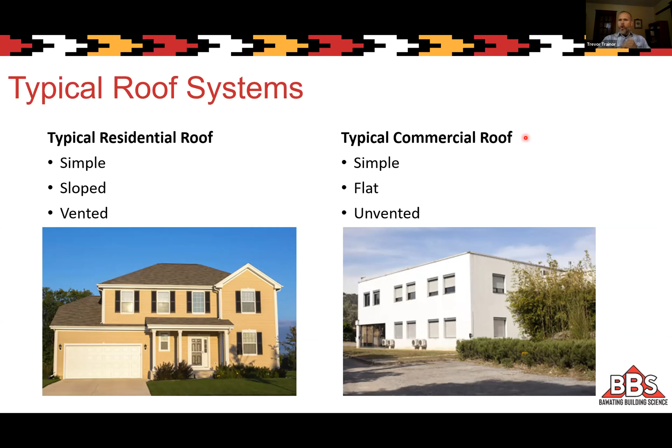So when we have these two different types, we know how to do them, and it works pretty well. Where we start to see issues is when we mix and match these things. In the residential arena, what I'm seeing are a lot of flat roofs, roofs that have high slope along the side and flat on the top. So there's a combination of the two. I guess even these aren't really a typical mansard that we would have seen in the 70s or 80s. These are different because there's often a living space up in there, and a lot of complexity to these types of roofs. So we see a mix of sloped sections and flat sections.

What we are seeing is when we attempt to ventilate some of these types of roofs, like we did with our classic residential roof, it's really difficult to do. We just get poor ventilation out of them because of the geometry typically, and because of the construction techniques we use. So these are the ones we're going to really talk about in detail, and what type of approaches we can use to address some of these more complex roofs.

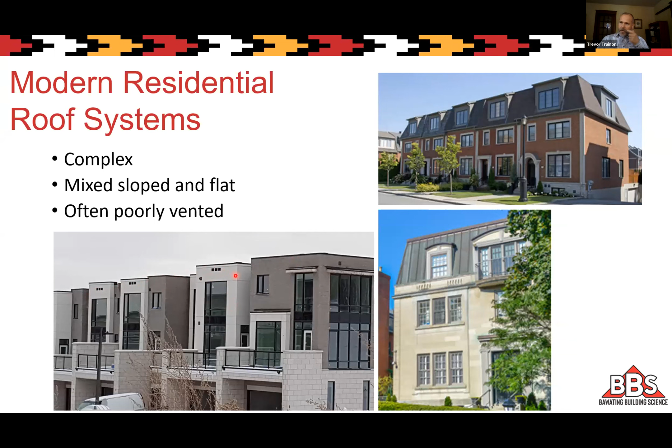So anyways, as you can see in this picture, this was a development beside one I was working on. The development I was working on looked a lot like this, but they used an unvented roof approach. In this one, you can see that they're attempting to use a vented roof approach. More about why I don't recommend that.

So to get down to some of the building science fundamentals behind this, we're going to talk mostly about air movement in buildings. For air leakage to occur in a building, we need two things: we need a pressure difference across the building enclosure or within a building enclosure, and we need some type of hole, some pathway for the air.

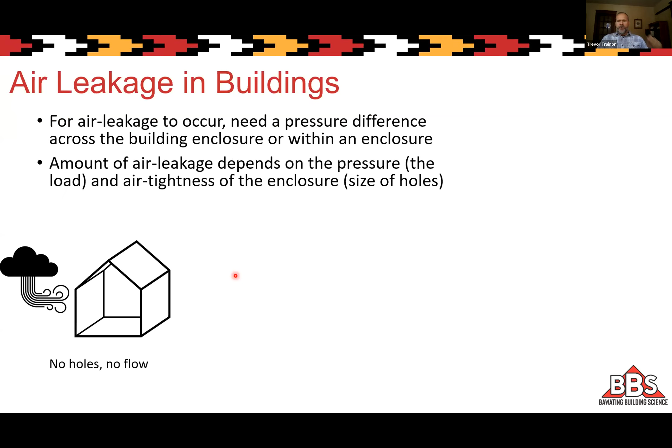So if you have pressure and no holes, if you have a perfect air barrier, you'll have no air leakage, right? You can have holes without pressure potentially, and you wouldn't get any air leakage either. It's only when we have those two together, a pressure difference and a pathway, that we're going to see air leakage into or out, or both, of a building. So it's important to realize there are two factors at play, and they play off each other, as we'll talk about in terms of a balancing act.

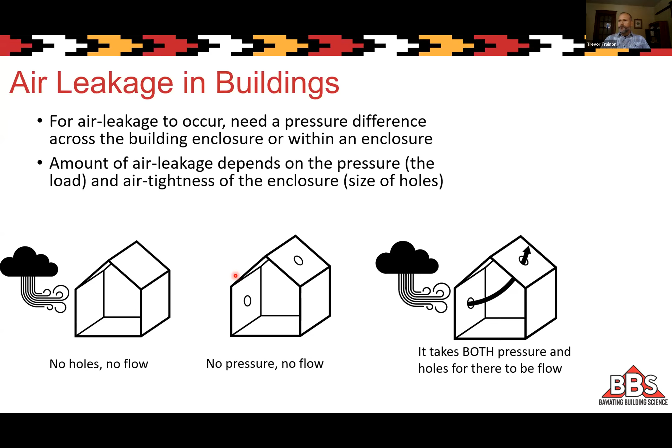So the first thing we think about typically when we talk about pressures on buildings is the wind. The wind's the most extreme pressure a building will see. Wind pressure is very much a function of the wind speed in the area you're in, the building geometry - is it a tall building, a short building - and also what's around it. What's the local topography? Is it sheltered? Is there a wind tunnel due to high-rise buildings tunneling area? This is a very complicated thing for an engineer to try and estimate because of all these factors.

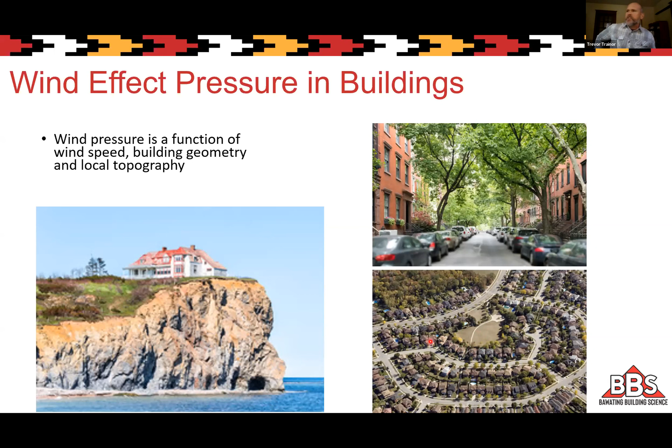So obviously in these three examples, we're going to see very different wind patterns, peaks and averages. It's difficult to predict, especially when we're designing a building. Obviously this building on the cliff is custom designed - they knew exactly where it was going to go. If we look at the bottom right example, all of these houses, as they're designed, it's not really specified which direction they're facing or what's around them. So it's not something we can really design to, but it's an important factor.

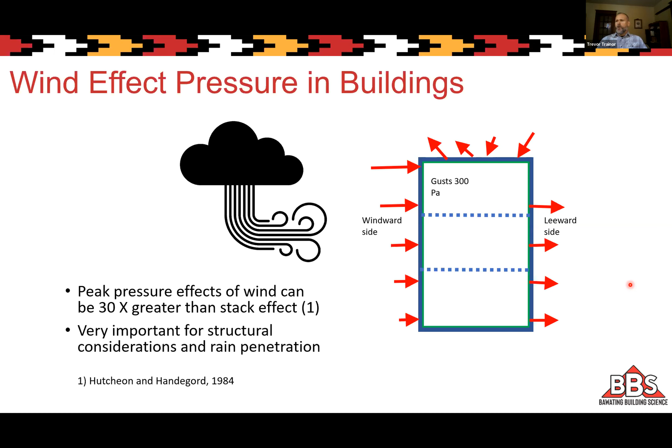The other thing we need to remember about wind effects is that the peaks are really what we're worried about in design, not so much from a building science standpoint, more from a structural standpoint. The peak wind pressures we see can be 30 times greater than the next type of pressure we're going to talk about, which is stack effect. So the peaks are really high for wind pressure, and it's important to think about those peaks in terms of structural considerations. How is your cladding attached? Rain penetration, it's important to understand those peaks for that reason.

But overall, the average pressure due to wind is actually a lot less. It's only a tenth of what the stack effect pressure would be on a building on average, which we'll talk about next. So it's really that long-term average that's important from an energy analysis standpoint or for natural ventilation. If we're trying to use it for natural ventilation, it's not very reliable, because although the peaks are high, the averages are very low, so it's definitely less effective in terms of relying on wind pressure to help us.

So we don't really want to rely upon wind pressure as a significant contributor to attic ventilation—that's really one of the points I wanted to make here. That's an interesting point, because from my background as a builder, and of course building science training, it's very easy to think, well, the wind's always going to depressurize, it's always going to carry the bad stuff away. But your point is it's not reliable—it could be creating a positive pressure one day and a negative pressure the next day, depending on directions and depending on what the surroundings of the building are.

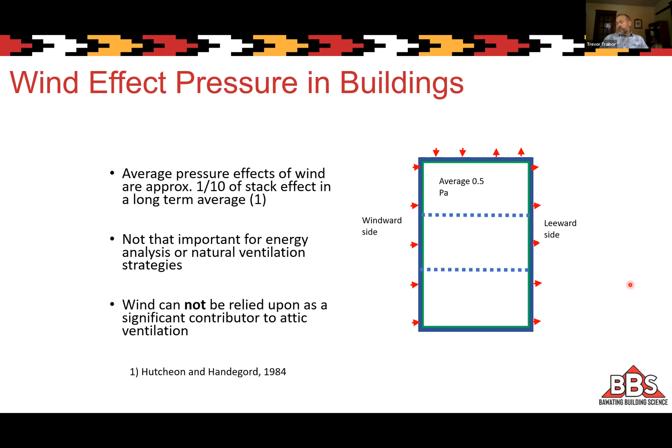So wind effects are the ones we think about the most, but it's probably not the most important in terms of roof ventilation, which is what we're going to talk a bit more about, or even air leakage potentially. We might realize that stack effect is actually probably more important.

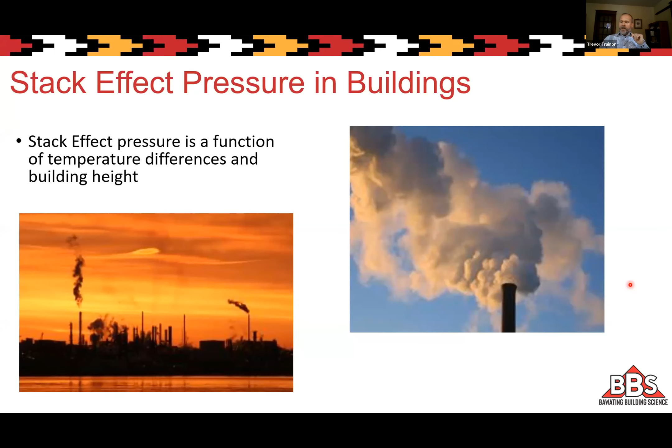So stack effect pressure is a function of the temperature difference from inside the building to outside, and of the building height. It's probably important to note here that this is really a cold climate focused presentation, and we're assuming we're in the heating season for a large portion of our year. Because if I was to try and give this presentation in Texas or Arizona, we'd be talking about different things in different ways, because stack effect is not nearly as important there. So as a cold climate focused group, stack effect is really important for two reasons.

The first is the effect it has on air leakage in our buildings. Stack effect pressure is a result of the different densities of air at different temperatures. So as an example, if we have 20 degrees Celsius air inside, it has a density of 1.2 kilograms per meter cubed, whereas if it's -10 outside, the air density is 1.34 kilograms. So the air inside the building is much lighter than outside, and it wants to rise up—just like a hot air balloon wants to lift that balloon up, this is going to try and force air out the top of the building.

And if air can leave the top of the building, it's going to try and suck air in at the bottom of the building. So we have these different pressures at different areas of the building, and where they meet, where we go from a positive pressure to a negative pressure, is what we call the neutral pressure plane. I won't talk a lot about it, but it can be useful, even forensically, to determine where the neutral pressure plane is in a building. If there are more holes high in the building, you'll have a higher neutral pressure plane, and if they're lower, you'll have a lower neutral pressure plane. That's something we can quickly measure in a building and use to help us. But really the key point is that stack effect happens whenever it's cold outside and warmer inside—the colder it is and the taller your building is, the higher these forces are going to be on your building.

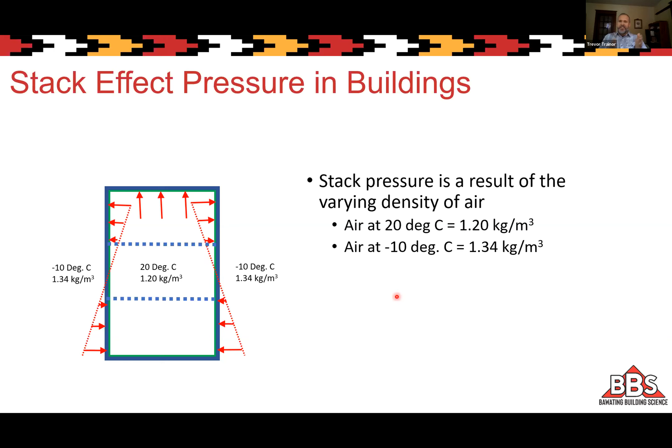And it doesn't change day to day, changes season to season, but not on a daily basis due to like wind does. So what can we see? We can see pressures in the range of about probably 6 pascals of pressure, positive at a roof and -6 in a basement, say for a 3-story townhouse, for example. It's pretty typical, again depending on the height of the building, depending on the temperatures outside.

But remember, this is sort of a constant pressure from a day-to-day perspective. So if you do have leaks up high in your building, you're going to get that air leakage outward, and it's going to be pretty constant. It's not going to be just during the day or just at night or just when it's windy. It's going to be pretty constant.

And so the cumulative effects of that air leakage actually make this stack effect really important, as opposed to wind effects, which may create air leakage at a higher rate, but only for a couple seconds at a time.

So vented roofs, that's important to understand when we talk about getting to venting roofs also. So not only does the stack effect pressure affect the building, it actually affects our vented attics also. And I'll get into that a little bit more.

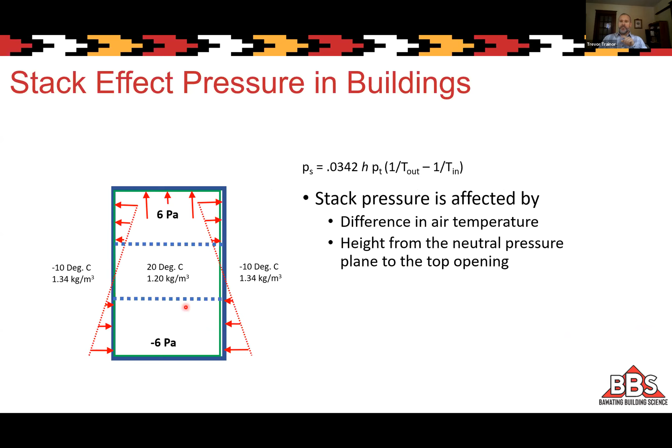So vented roofs we're going to talk about first, and why they usually work and why sometimes they don't work. So if we had this, I kind of use this simple diagram to help understand some of these effects. And we use this also in some of our forensic cases to kind of explain what's going on.

So if we had a perfect air barrier in our building, we're still going to have this 6 pascals of pressure trying to push air out of the building. But if we have a perfect air barrier, we're not going to get any airflow. We'll get some heat loss from the building into the attic. And so what that's going to create is the attic's going to be a little bit warmer than the outside temperature, just from that heat loss, but only a little bit. And we have no moisture that's able to move from inside the building into the attic if we have that perfect air barrier. So if we have a perfect air barrier, we don't really even need ventilation, right?

And this is going to kind of come back when we talk about unvented roofs and how they can work. But the reality of the situation, especially in our typical roofs, is that we've got these holes, right? When we're typically using polyethylene sheet as our air barrier, it's really difficult to make that very airtight. We've got lots of penetrations, we've got joints, and we've got transitions in areas that are difficult to seal.

So in reality, we're probably looking at this, where we're getting a certain amount of air leakage from inside the building. And because of this stack effect pressure, it's going to constantly go into the attic. And if we have no ventilation in our attic at all, it's just going to build up. You're going to get a warmer temperature in here. We're going to have very high humidity till it basically hits 100% humidity. And that's when we start to see our attic rain. Or in this case, depending if it was really cold out, it might be attic frost. That will turn to attic rain on the first warm day after that.

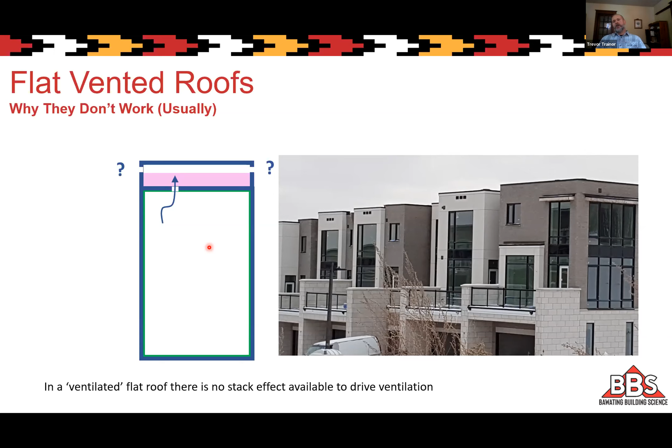This is why I don't recommend attempting to ventilate a low slope roof like this, because we don't have that reliable stack effect due to the height difference to drive ventilation regularly—we're really just counting on wind. I think it was John Straube who said that's the Dirty Harry approach to ventilation: are you feeling lucky? I never feel lucky, so I like to have reliable sources of ventilation.

So again, this is a balancing act. If we're going to keep moisture from accumulating in our attics, we need to make sure we have sufficient ventilation and low enough air leakage from the building so that balance is maintained.

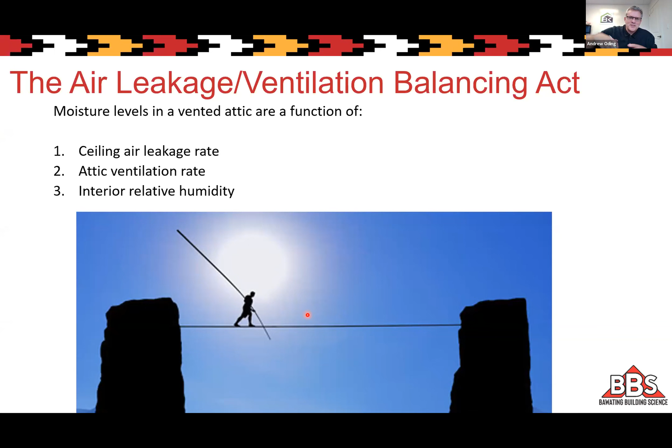Hey Trevor, real quick—you might talk about it in the future, but we had one comment about using a roof ventilator, a fan-powered assist, or the old squirrel cages we put on the roof where the wind would blow them and suck that bad air out. What's your thought on that?

I don't address that directly, but indirectly—the interesting thing is if right now in this example we have a 0.5 Pascal positive pressure in our attic, that means the air wants to flow out. If we start pulling air out, we might create a negative pressure in here relative to the building. Say we had a power vent, or two power vents, sucking air out—the problem is now we're creating a negative pressure in the attic relative to the building, and we're going to start exaggerating this air leakage.

We're going to make it worse, so it doesn't help our balance. We're increasing one but also increasing the other, so we kind of end up in the same place. I remember there was a CMHC project years ago in Sudbury that had attic rain, so they put in squirrel cages. What ended up happening is it exaggerated the leakage and pulled more moist air in. About a month later, someone was saying you'd see plastic bags over top of these squirrel cages. I have seen that.

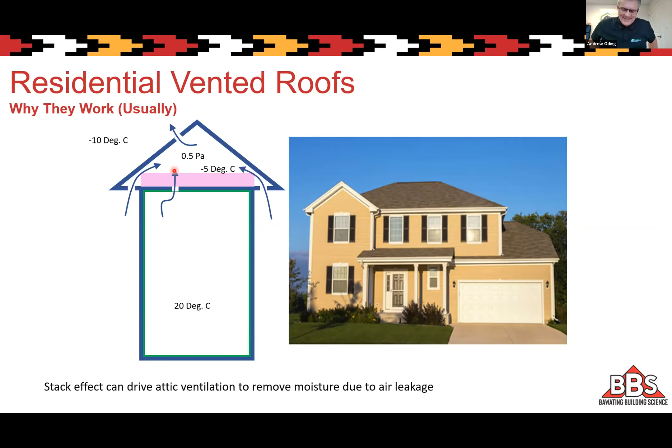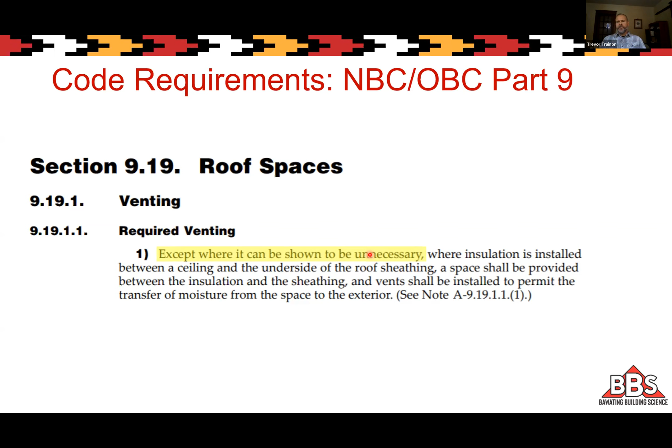Right, interesting. In reality, what we're seeing in the field is that oftentimes, to make building inspectors happy, the 'except where it can be shown to be unnecessary' clause is satisfied with an engineer's letter saying we've looked at this system, analyzed it, and it doesn't need to be vented. There's different approaches to that, one of which is hygrothermal modeling, others just experience or research in the field. I found it really interesting that they specifically called out factory-built buildings, but I think it should be a lot more general than that.

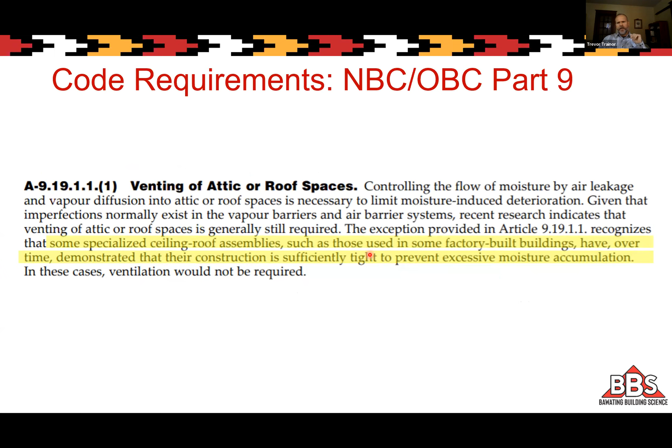Then venting requirements - this is the part most people are familiar with. It says, except as provided in the next sentence, unobstructed vent area shall not be less than 1/300 of the insulated ceiling area. That's our typical vented roof. But where slope is less than 1 in 6, or in roofs constructed with roof joists - which I find a little strange - the unobstructed vent area shall not be less than 1/150 of the insulated ceiling area. So if we have a flat roof, a low slope roof, or a vaulted ceiling with very limited air movement above, we have to use twice as much venting.

These are obviously very general requirements, and these numbers tend to work well for us for the most part, but just because you meet the code doesn't mean you're necessarily not going to have any problems. That really comes down to how airtight your ceiling plane is. If you have excessive air leakage, either of these could be not enough. If you have really good air tightness, we could get away with much less. But if you don't understand exactly how airtight your ceiling plane is, this is probably a relatively good approach. Although, like I said before, I don't recommend low slope roofs to be ventilated, for the reasons we talked about.

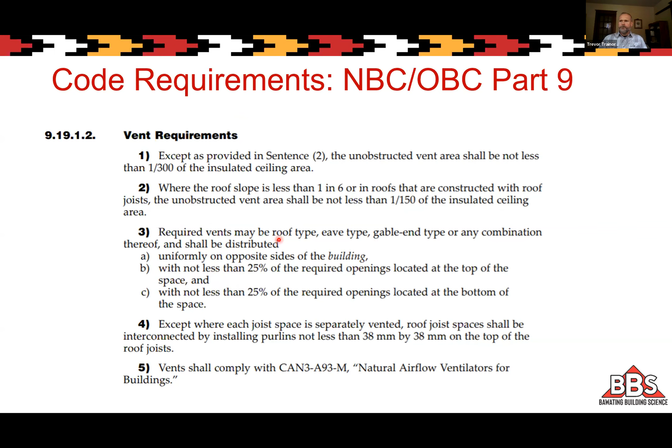So now I've got a couple of forensic case studies - one specifically related to a ventilated roof that had problems. This was residential, the kind of buildings I'm seeing a lot in Toronto. This one, the roof, as you can see, has no roof overhangs at all, so soffit vents are out of the question here. There's an integrated gutter system behind this little parapet wall, a steep pitch at the perimeter, and a flat section on the roof.

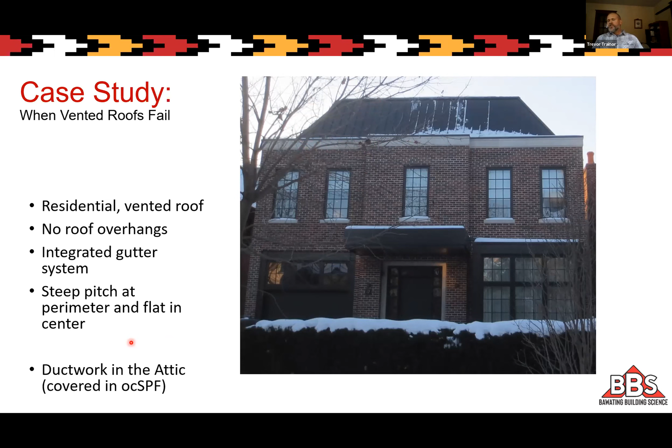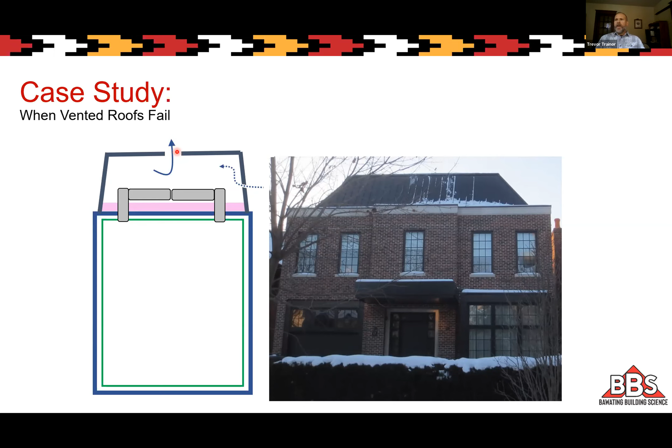Also note that there's ductwork in the attic, because that became an important factor. So to show that in simple form: we've got the main part of our building with our air barrier, our roof sitting on top, and just blown-in insulation. We have some ventilation, lower down in the roof, and quite a bit at the top of the flat roof. This represents our ductwork that goes up into the attic.

So what were the issues? The first issue was they were seeing water marks, water staining on the second floor ceiling after a long cold spell, once it warmed up. So they thought that was potentially an issue.

They went up into the attic on a colder day and found excessive frost buildup on the roof sheathing, at one of the vents. This is actually supposed to be an intake vent, but because of the dynamics of this roof, it ended up being more of an exhaust vent, even though it was lower down in the ceiling.

So the first thing I did was evaluate the ventilation. It turns out there was sufficient ventilation high up in the roof to meet code—4 twelve-inch round vents. I think 1 or 2 of them were whirlybird vents, and we suggested they change those to static to avoid the problems with negative pressurization.

The big problem from a ventilation standpoint was that there was very little low ventilation. These were integrated into the steep part of the slope, very small, 1 inch by 8 inch vents, and there are 6 of them on the whole building.

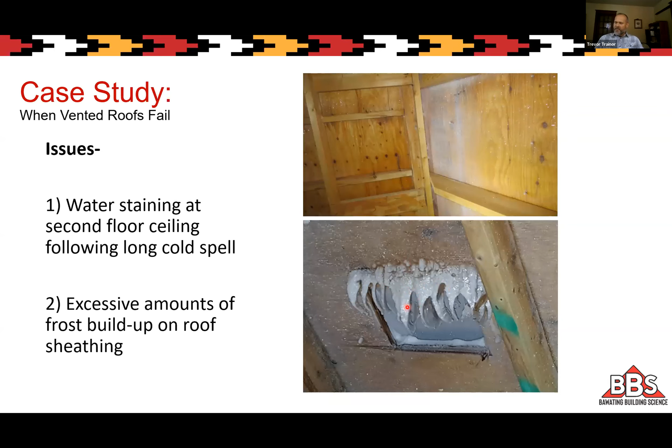So we did the ventilation analysis and said, yeah, there's definitely not enough low ventilation. There's also some other problems. The ductwork itself was actually very leaky, and it was covered with open cell spray foam.

This is just one example of the gaps in the open cell spray foam we could see and feel. Open cell—some would call it a half pound foam—is an air barrier, but it's not a vapor barrier, and it's not even an air barrier when there's big holes in it. That's probably the biggest issue.

I believe they were counting on that spray foam as the sealing for the ductwork. I did find later in the code that it's very specific—while you're allowed to put spray foam on ductwork, prior to that you need to air seal it properly. The code calls out a few different ways to do that.

So one thing I had to teach the builder right away was that we can't count on spray foam at all to seal ductwork, and certainly we can't count on half pound or open cell spray foam to seal anything, really, on ductwork.

Leaky ductwork, insufficient low ventilation we talked about, and we did also find some pretty significant air leakage at the ceiling plane through pot lights and some other detail areas that were not properly done.

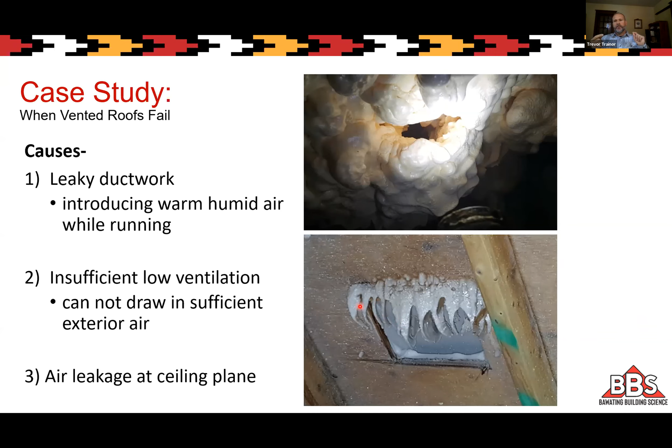So all 3 of those were contributing to an imbalance. Our balance is gone because we're putting too much warm, moist air into the attic, and we have too little ventilation to avoid accumulation. So what do we recommend?

We recommended properly air sealing the ductwork and properly air sealing the ceiling plane, and they did that. We recommended installing more low vents. They couldn't really add too many more, but they did add—I think they doubled the number. They're still not very effective vents the way they're designed and positioned, but we added quite a bit more.

And then as a temporary fix, we added this inline fan and attached it to one of the low ducts. What we were doing here is drawing in cold air. So as opposed to a power vent, which pushes air out, we're forcing air in because there was so much moisture accumulated in the sheathing and in some of the wood members that we needed to dry it out for a month.

When you say air seal, it looks like complex geometry there. Is that closed cell spray foam, maybe a single lift? Yeah, there was some closed cell spray foam used at tricky areas to make that seal. It's not always the best way to approach that. Obviously, from a design standpoint, you wouldn't make it mostly poly and then use some spray foam, because the two don't play together that well. But we made major improvements in the air tightness of the ceiling plane, and then used this fan temporarily to dry out the attic.

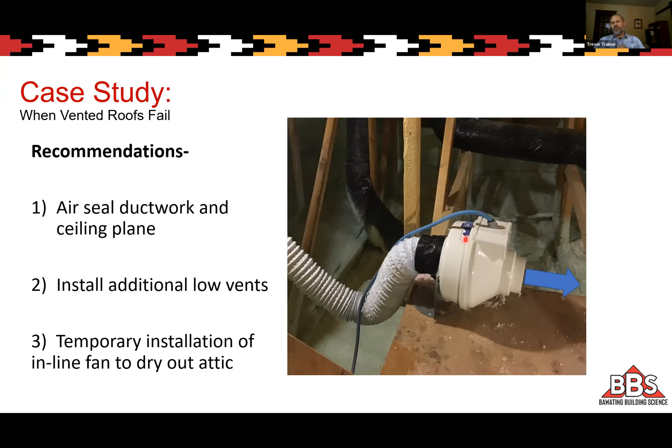So a bit of a summary then, some of the benefits of vented roofs for residential: they can work in any climate, cold or hot. Generally speaking, they're cheap and easy, since we can use lots of loose fill insulation if we want, and get high R values without too much cost. We're really familiar, the trades are really familiar, with the polyethylene air vapor barrier, and it's readily available and cheap to use.

This system can tolerate some air leakage from the building into the attic, because it can flush that out if we have enough ventilation. Also, an attic like that is really good at drying out. Once the weather changes from cold to warm, or even just a hot day, even on shoulder seasons, a lot of drying can occur because the attic is vented. So even if we do get some accumulation of moisture in the attic during the winter, as long as it's not too much, we can dry it out quickly once the weather changes.

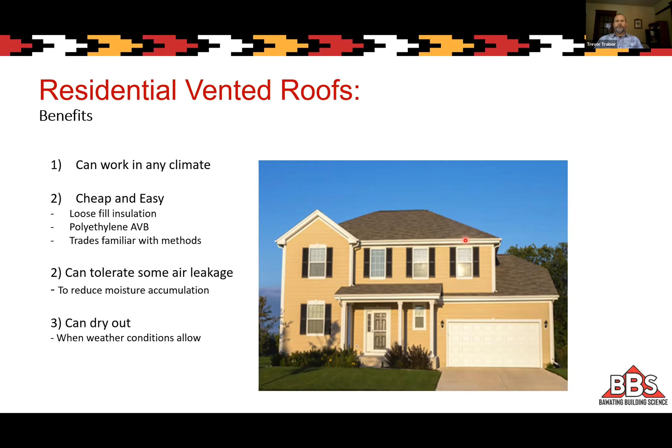What can go wrong? Any thoughts on the difference between, say, a plywood versus an OSB roof sheathing? I think there is some difference, but not a lot. In terms of ability to withstand moisture, I think they'll both absorb moisture and become wet really easily. The only real difference is plywood will last a bit longer being wet - instead of seeing your roof sagging after 3 years, it might take 5 years or something. They're both going to break down, and OSB will break down a little faster, but I don't think it's a major difference between the two.

So what can go wrong? Too much air leakage, right - pot lights, attic hatches, we see over-pressurizing the building. If the building is being pressurized by the mechanical system, that can force more air leakage into the attic, and same with negative pressurization of the attic. The other thing is just not enough ventilation, so we don't have enough free area. Sometimes we have clients who want these fancy vents that don't look like vents, but they also don't work like vents. They need to function - we need enough free area in the vents to allow that air movement.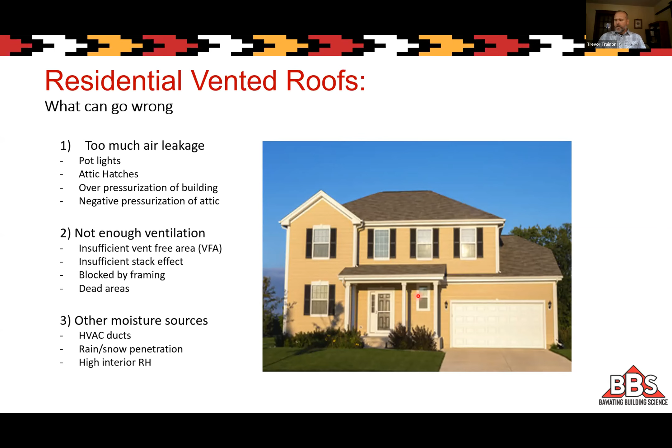So, unvented roofs. Sometimes, as we know, we don't want to vent our roofs, and we'll talk about what those circumstances are. We're going to talk about why unvented roofs usually work, and sometimes they don't. So when should we consider changing from our normal vented roof to an unvented roof?

I think when roof lines get really complex - there's a lot of blocking, a lot of framing, dead ends, dormers, and roof sections that become walls - when things get complicated, it becomes difficult to properly ventilate, and so we should start to think about whether an unvented roof's better. Certainly vaulted ceilings - if we're going to have vaulted ceilings and we don't want a large attic above them, we probably are going to want to consider unvented for that.

Low slope roofs, flat roofs - we talked about why that is, because they don't have the ability to constantly ventilate themselves. Trevor, what would you consider to be low slope? Less than 3:12. Okay, less than 3:12, that's a good point, just a good rule of thumb. It's a good rule, and that's the general rule for using different roofing materials, right?

Does the building code assume that a wall becomes a roof at what, is it 2:12? Yeah, we had this conversation. Yeah, I forget how it defines it for sure. Okay, don't worry about it. But I think the thing to think about is if it's connected into the roof, connected into the attic, then we should try and treat it like a roof as opposed to a wall, because if there is communication of air between the two - yeah, it gets blurry for sure.

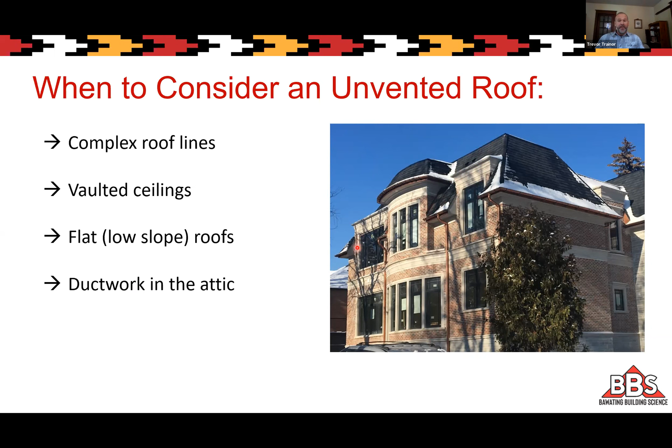So let's go back to that commercial unvented roof, the super simple one that just works. Why does it work? Well, first of all, we've got multiple layers in this roof acting as an air barrier. So we've got our fluted steel deck, or even a wood deck with trusses, whatever you've got here, and you've got some type of sheathing over top of that, and a specific air barrier, and maybe an air vapor barrier right at this level.

Then we've got layers, probably multiple layers of rigid insulation, staggered joints potentially, and then a whole other layer of probably a fiberboard or something to hold our roof membrane, and then the roof membrane itself, which is continuous. So all of these layers are air barriers to themselves, and when you start to stack them all up, there's very limited risk of air moving through this assembly because of all those air barriers.

The other great thing is now our insulation is exterior to our structure, so that means our structure stays on the warm side. If warm, moist air from inside gets up into here, there's no cold surfaces for it to condense on, so we don't have to worry about condensation down at this level.

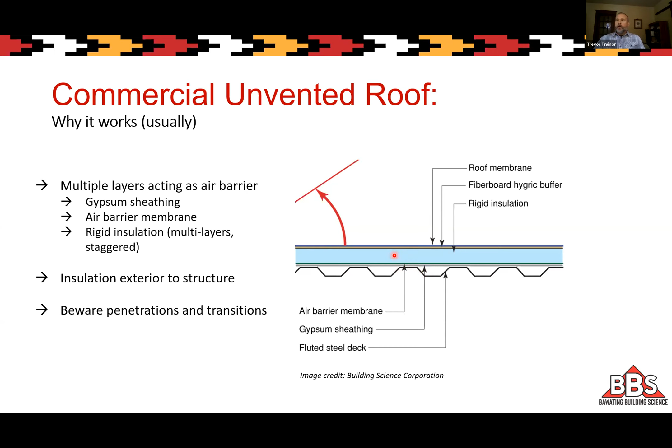And really all we need to worry about in an assembly like this is penetrations and transitions - how do we transition from roof to wall, how do we deal with a chimney poking through, right?

I think I have some examples of that. In this case, you could see, and I do see problems on flat roofs, and it's almost always these two areas where things penetrate through.

The air barrier, which is down here at the bottom, doesn't get properly sealed. It's not continuous at these penetrations sometimes, and we'll get air leakage and moisture issues around it. We'll see condensation and wet sheathing up here at the top of the penetration.

The other thing we see are parapets. So if this air barrier comes to here and just kind of stops because this parapet was put on before, what's to stop warm, moist air that's in the building from going up into this parapet and finding cold surfaces to condense on.

We've actually seen, and you probably have too, spalling or efflorescence or subefflorescence, whatever is sometimes occurring in parapets, and it's from the air leakage that's working its way up in there and then leaving the water.

That's interesting. Yeah, I was at a swimming pool where we went bright and early in the morning. It was like minus 15, I think, out, and there was steam coming from under the parapet cap.

So what we need to make sure in this case is that the air barrier is put on continuously under the parapet and ties in to the wall system air barrier. We see this now a lot more, where there's a strip of air barrier that's installed before this parapet's built, and we just have to make sure we tie in properly on both sides of that after.

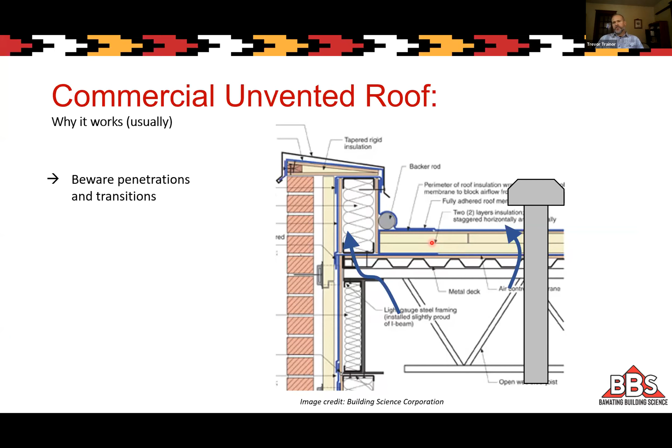But what we realize residentially is that this is a pretty expensive way to build a roof compared to how we do it residentially, so it's not a common approach. So what are the approaches we're seeing in the field residentially when we get to unvented roofs?

The first one, and notice the big red not recommended. I used to have it down here small, and someone said that looks terrible, like, oh no, it's not recommended. Sorry, but it happens.

That's just basically sticking batt insulation and a polyethylene air vapor barrier into a roof. This could be sloped or it could be flat, in all these examples I'm going to show you. Same theories are important.

So this batt insulation has no ability to slow down air, and so we're completely counting on our polyethylene air vapor barrier. As we know, in most cases that is not a very good air vapor barrier, which it would have to be. It would have to be almost perfect for this system to not fail.

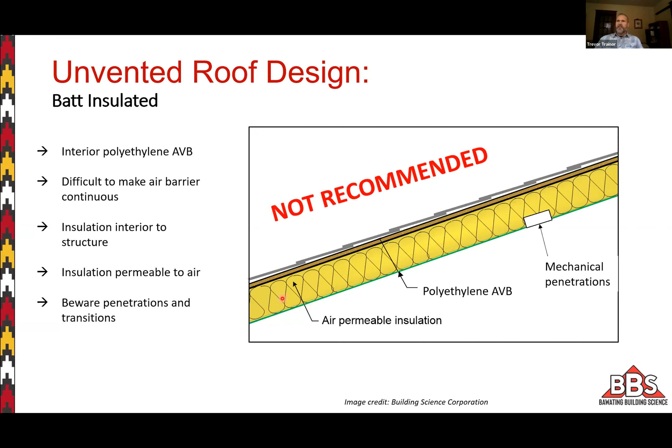Because any moisture that gets past our air vapor barrier here is going to start going up this slope, meet the cold sheathing, and condense. It's going to build up tons of moisture very quickly. That's why this is something we still see sometimes, but it's definitely the not recommended approach.

So what are some of the recommended ones we see? Obviously, this is basically a residential version of that commercial roof. All the insulation's on the exterior of the sheathing, and the air barrier is exterior to the sheathing.

We also don't see this very often because it is a rather expensive way to build, but this is the sort of ultimate way to do an unvented roof. It's easy to make the air barrier continuous. The insulation's all exterior to the structure, so the structure stays warm and dry.

But even in this, we have to worry about penetrations and transitions, because that is always going to be an issue we need to deal with.

I think I remember Joe Lstiburek talking about he did this on his barn, and he made the same comment that Gord Cooke made when he did this on his cottage, that you just need to make sure you put a slip sheet material in between the insulation layers, because as it gets hot outside or cools, they move.

Yes, and I remember Gord saying they would be inside the house and it's dead quiet and they'd hear this clicking sound. Oh yeah, ratcheting.

And then the other thing too is the importance of offsetting the butt joints. But anyways, if anyone hasn't seen it yet, there's a great article from probably 10 years ago now by Joe Lstiburek on the lessons learned from his barn.

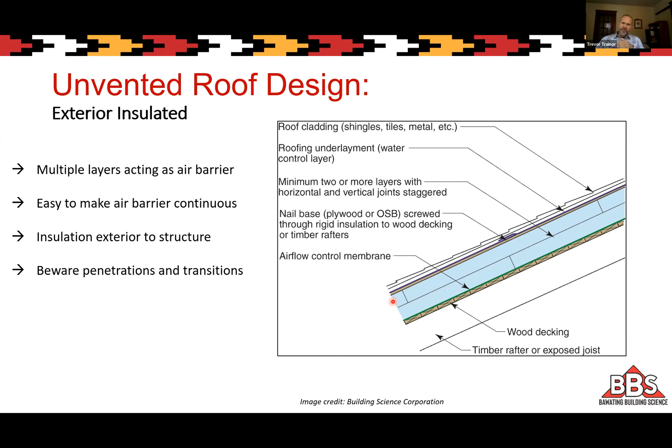But what are we seeing in reality? I'm not seeing a lot of this in the field. I've got builders who do a lot of unvented roofs, but they haven't gotten to the point where they're comfortable with the price of this and the constructability of it. So I'm seeing some other things that are similar, and they seem to be working well.

One example is what we call a split insulated system. In the split insulated system, we have a certain amount of foam board insulation on the exterior of the building, or exterior of the sheathing, and then we have a certain amount of batt insulation on the interior of the sheathing, typically between the joists. So what this does is it warms up the sheathing to a certain point, depending on what that ratio is. And we have two options of where to put the air barrier here.

We could put an air barrier right on top of the sheathing and under the rigid foam. But we can only do that if we have enough rigid insulation so that our dew point temperature doesn't get reached in here. It's all about the ratio of how much insulation is outside versus inside.

In our climate, like in Southern Ontario, 50-50, 50% R-value outside and inside would be very safe. You could probably get away with maybe 1/3, 2/3, but generally I would only do that after a pretty intense hygrothermal analysis. If you're going to try it and use 50-50 in Southern Ontario, you're going to be fine.

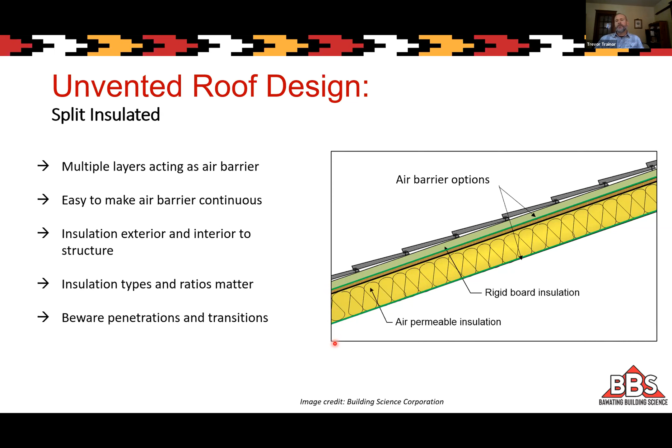The other thing I'm seeing probably a lot more of is just a pure interior installed spray foam roof system. I'm seeing only 2-pound closed cell spray foam typically for this, and I would only recommend that in our climate, at least. In this case, what we're doing is using our spray foam not only as the insulation, but as the air barrier.

It's really critical that when we're installing that spray foam, it's installed in an airtight manner, so we have to worry about air. Some areas aren't covered by the spray foam. So if you have a doubled up joist and you spray foam to each side of it, you still have that crack where those two pieces of wood meet.

So the insulation in this case is all interior to the structure, which means if air is allowed to get around it at cracks or at areas that are missed and can reach the sheathing, that sheathing is going to be cold and we're going to get a lot of condensation there. So that is the risk.

And we always have to beware of penetrations, things that pass through, and transitions. How do we make the air barrier of the ceiling or roof meet with the air barrier of the wall system properly? So those are the details that really need to be worked out.

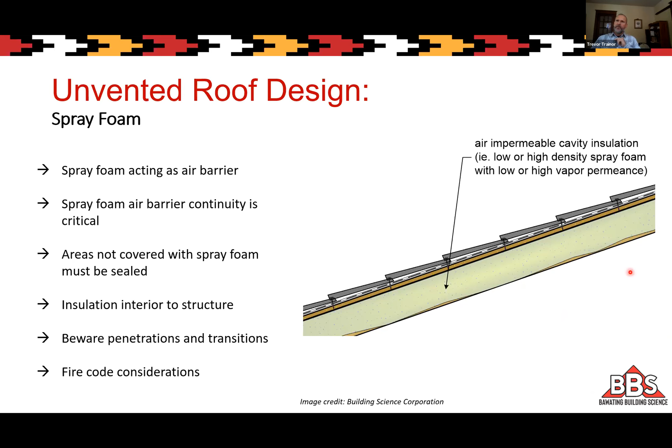And then there's sort of another version of spray foam unvented roof design we call flash and bat, which is a combination of spray foam and batt insulation or blown-in insulation.

So what we see here is a certain amount of spray foam installed directly to the underside of the roof deck, and then filling in below that to get more R value with either bats, which might be difficult to do depending on how smooth this is or if there's anything to hold it. What I'm seeing more of are blown-in bats with mesh or netting. Oh yeah, like BIBS.

Yeah, and so the same cautions apply here because in this case, the spray foam is still our air barrier and it needs to be continuous. We need to seal wood to wood joints that don't get covered by foam, and we need to make sure that the installer didn't miss a spot. Even a little gap could create problems.

And we have the additional issue here, similar to our split insulated wall where we have exterior and interior - we have to make sure that the ratio of spray foam R value to bat R value is acceptable. That 50-50 ratio is a safe number to use, because if we use too little spray foam and/or too much blown-in, we're going to have condensation forming on the underside of the spray foam potentially if it's too cold. So another dew point issue - yeah, we could still have a dew point problem if we don't have enough spray foam here. So again, that 50-50 rule will be pretty safe in Southern Ontario. It may need to be more in colder areas than that.

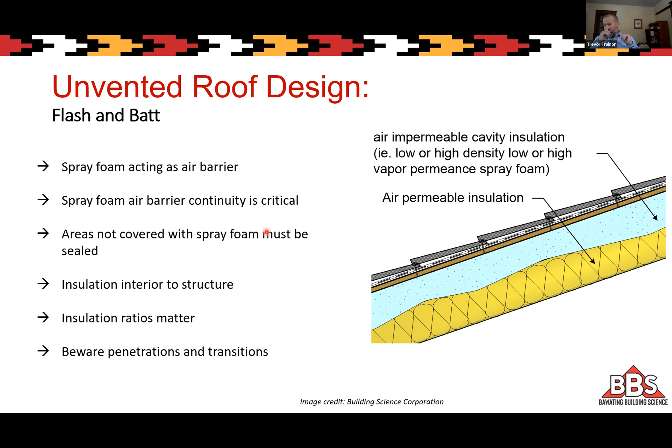And just like anything else, I'll keep saying it - beware of penetrations and transitions. That's where we see most of the problems, where things are poking through. So just like with a vented assembly with poly, you're saying the same for here - it's compromising the air barrier, it's the penetrations that cause the issue. Yes, it's the pre-wire folks that come in afterwards to do the speakers or the fancy pot lights or whatever. Or we forgot to put in a certain vent until near the end and the spray foam's already there, so someone cuts through it. Nobody really checks that you didn't cut the hole twice as big as it needed to be through the spray foam. That's the quality assurance, quality control side that's really important for a lot of things, but especially for spray foam, I think.

And so just some examples, because I do so much of this inspection work. I kind of have different levels of inspection, but the highest level I do is to negatively pressurize the building during the inspection and use thermal imaging to look for leaks, and it works out well for photos for sure.

But rim joist areas - this is really classic. A lot of times the spray foam installer is shooting at an upward angle into the rim joists, and there's a little bit of shadowing in there. If he doesn't shoot down onto the top plate, there's often, as you can see here, these little gaps, and you can see what that looks like as soon as the building's under a bit of negative pressure - we can get quite a bit of air leakage coming through those areas. So they need to connect that spray foam air barrier to the top plate, or the air barrier in the wall, is what you're saying. Exactly, and it's especially important where each joist rests on top of that top plate. It's all about spraying angles.

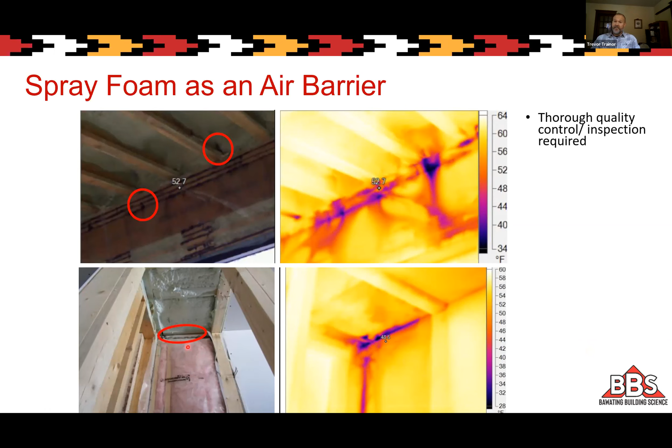Yeah, so just some other examples of air leakage spots. When we try and transition from spray foam to poly, that can be a tricky proposition, so we got to be careful there. Where we have these bigger penetrations, especially wiring, it's tough because it moves - it's not like a solid surface. And as an example of a really bad air leak I found pretty easily - you didn't really need IR to see this one, but we used it.

And the other one that's actually really tricky is fireplace vents, because we can't spray foam up to them like we can with a bathroom vent. Right, and so there's special detailing we need to do to make sure that we have something that carries the air barrier from the outside of the fireplace vent outward and ties into the spray foam in a safe, fire-safe manner. So there's sheet metal and fireproof caulkings and stuff that you need to utilize to do that.

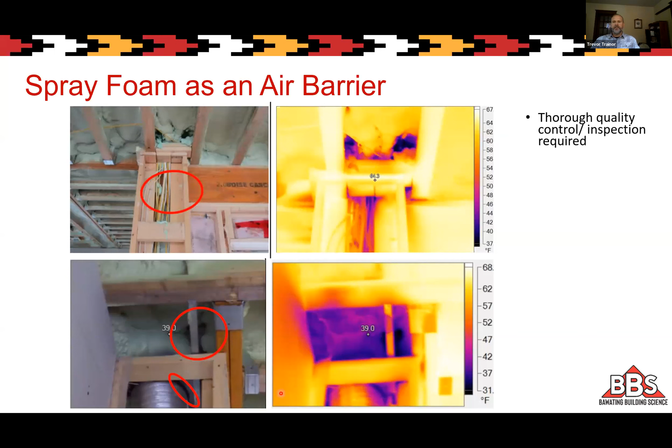Just a special example too, in terms of unvented roofs, would be SIPS panels. Just some cautionary tales about that.

In a cold climate, we really have to be concerned about air leakage at the joints of the panels, especially where the panels sit on ridge beams or purlins. We need some type of air sealing that goes on before the panel that we can tie into, because once the panel is sitting there, there's no way to then air seal the joint all the way up in a 3D manner.

And so there's been some pretty well documented issues of what we call ridge rot in SIPS panels in cold climates, because some of these details were missed. Warm, moist air can get into the joints and travel up to the peak where it can deposit water due to condensation.

So there's no panacea, there's no silver bullet here. Whatever system we use, we have to make sure that our quality control is really good, that the air tightness of the system is really good, because the only way an unvented roof is going to work is if the air tightness of the ceiling plane is very good.

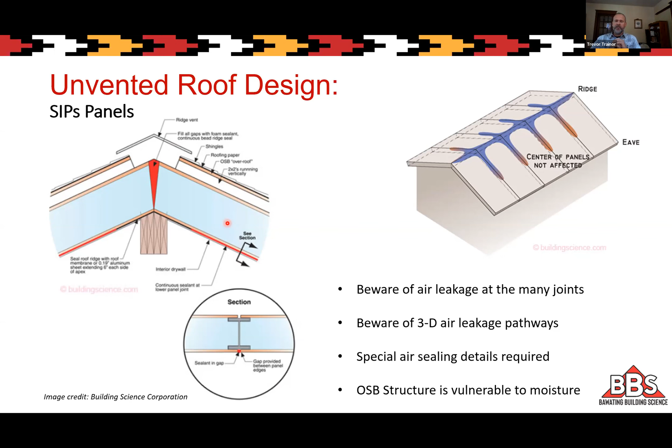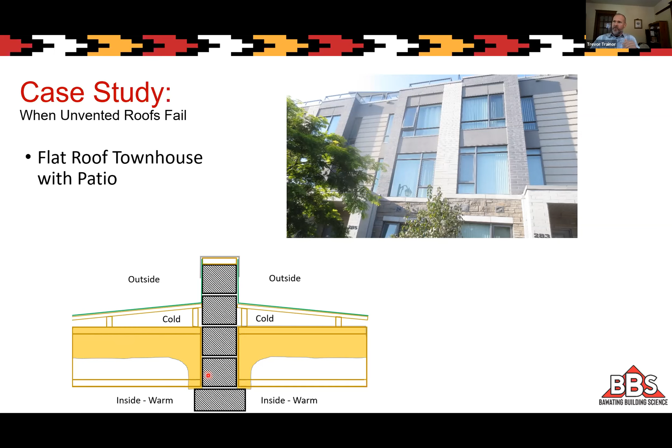Real quick, a little case study related to an unvented spray foam roof. This was actually the design, which wasn't built this way, but the design was supposed to be 2-pound closed cell foam to the underside of this deck and down each of these parapet walls. But in reality, when the contractor got there, they thought it'd be a good idea to switch to open cell foam instead.

And they knew that because they're using open cell foam, they had to use a vapor barrier. So they did put a poly vapor barrier in. But what they didn't do is treat it like an air barrier. They just kind of left it flat here at the concrete block walls.

And so what they saw over time was a lot of warm, moist air was getting up into here. When we opened it up, you'll see a bit of the demo pictures. There were actually a lot of voids and pathways even through the spray foam, so it wasn't well installed. A lot of warm, moist air and moisture accumulation was happening in this little space where they created the sloped roof that they could walk on up here.

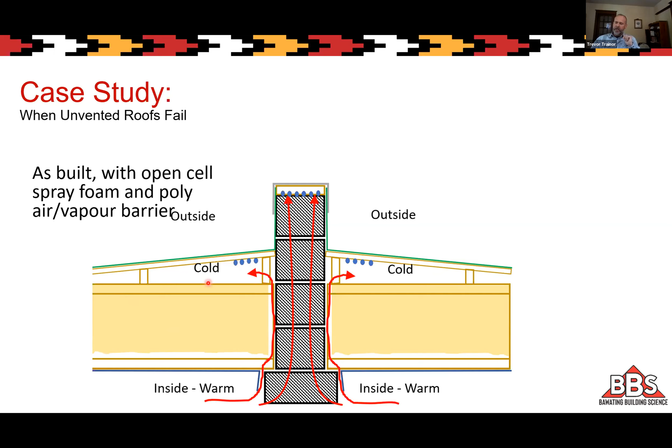So what does that look like in reality? The sheathing near the parapets was completely rotted out, and some of the I-joists were starting to rot out. Oh boy, now we're into structural. It started to become structural.

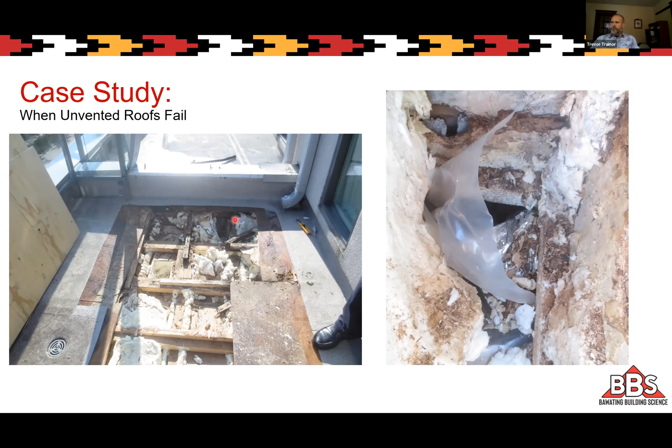Here is an example of the poly from the ceiling that was just kind of dangling. I could just pull it up. It wasn't sealed in any way to that block wall, it was just loose. So how did we fix it?

They definitely wanted to fix it from the exterior. So what we did was basically create a split insulated system by adding rigid insulation to the outside, adding a new air barrier so that no air could get past this green plane, adding a significant amount of exterior insulation above that and over the parapets, and then a whole new roof deck on top of there.

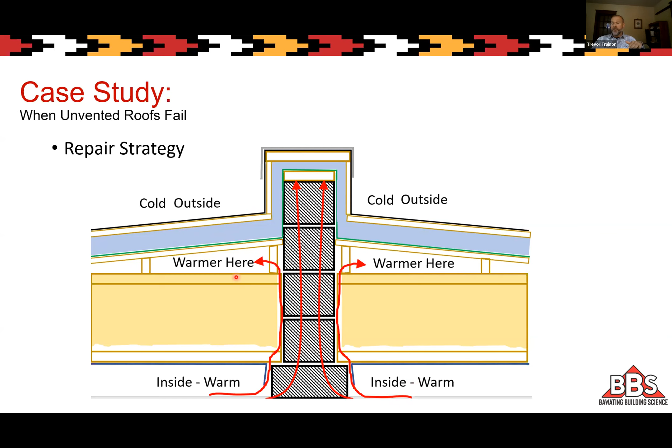So in this case, that warm, moist air is still going up in here, but it's warm enough in here to prevent condensation. Interesting, and that was the way they decided to do it. It was a pretty expensive way—they lost some height and had to move a bunch of railings and stuff—but they wanted to do this as opposed to going into the units and disrupting the tenants.

So real quick recap, what are the benefits of unvented roofs? Great for low slope and complex roof systems where venting is just difficult or not going to be effective. It's probably going to be easier in an unvented roof to create good air tightness because we can oftentimes use a continuous air barrier on the exterior that's not penetrated through by mechanicals nearly as much. So we're not relying upon questionable amounts of venting for performance—we just know there is no venting and we're going to make sure everything's airtight and well insulated.

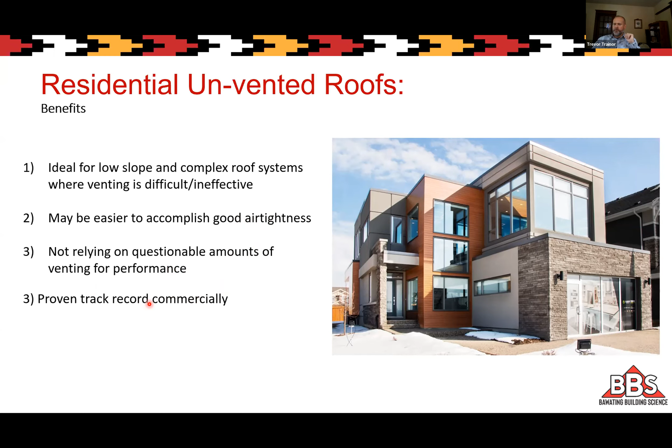And we know that there's a proven track record of these commercially. We just want to try and make our assemblies as close to that commercial assembly that we know works as possible. What can go wrong? Spray foam is an air barrier—it must be installed with a lot of care, and I always recommend third-party inspection for the continuity of the spray foam as an air barrier.

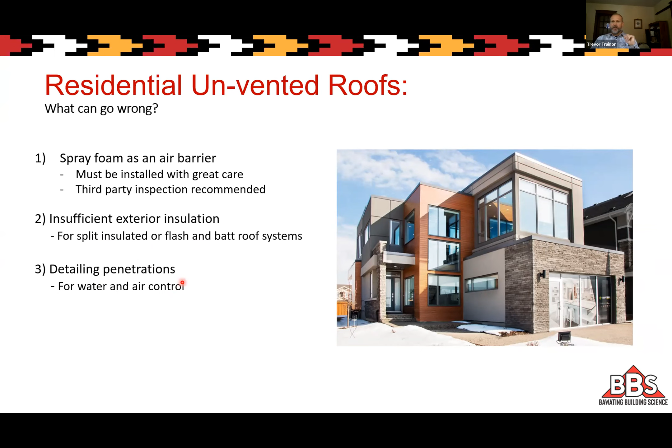The other thing that can go wrong is we have to make sure we use enough exterior insulation to avoid dew point problems in that split insulated or flash and batt system. And like anything, detailing the penetrations is also really important.

Very good, Trevor. That's awesome. That was excellent. And of course, we could take up a whole other session, and honestly, with the questions, we may have to do a version 2 of this, just so you know. So get ready for that one.